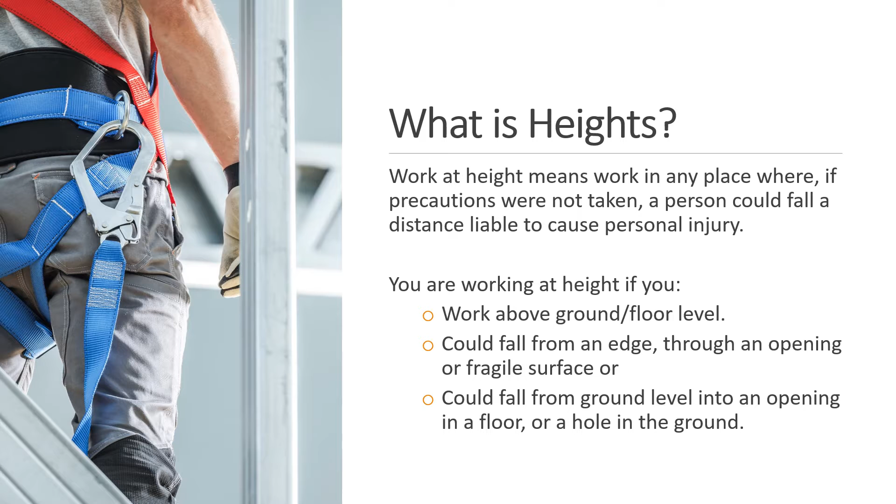When it comes to working at height, we must remember to ensure there is a proper fall protection plan in place. Although this is generally discussed in the construction regulations, no matter where a plumber is working at height, we need to ensure that all precautionary measures are taken to ensure that all work at height is done safely.

Let us have a look at some of the precautions as laid out in Construction Regulation 10 for fall protection. A competent person is to be responsible for the preparation of a fall protection plan. Risk assessments of all work carried out from a fall risk position, as well as the procedures and methods used to address all risks, must be identified per location.

The process for the evaluation of an employee's medical fitness necessary to work at a fall risk position, as well as having the records thereof. There should be a program for the training of employees working from a fall risk position, as well as records of those. There should also be a procedure for addressing the inspection, testing and maintenance of all fall protection equipment.

And finally, a fall protection plan must include a rescue plan detailing the necessary procedure, personnel and suitable equipment required to effect a rescue of a person in the event of a fall incident, to ensure that the rescue procedure is implemented immediately following the incident.

This fall protection plan, as well as the rescue plan, can also make up part of your emergency management procedure, since falling from height may constitute an emergency. This rescue plan must be specific to the site as well as the task being performed. Make sure everybody working at height knows and understands what these procedures are to prevent incidents and accidents from happening.

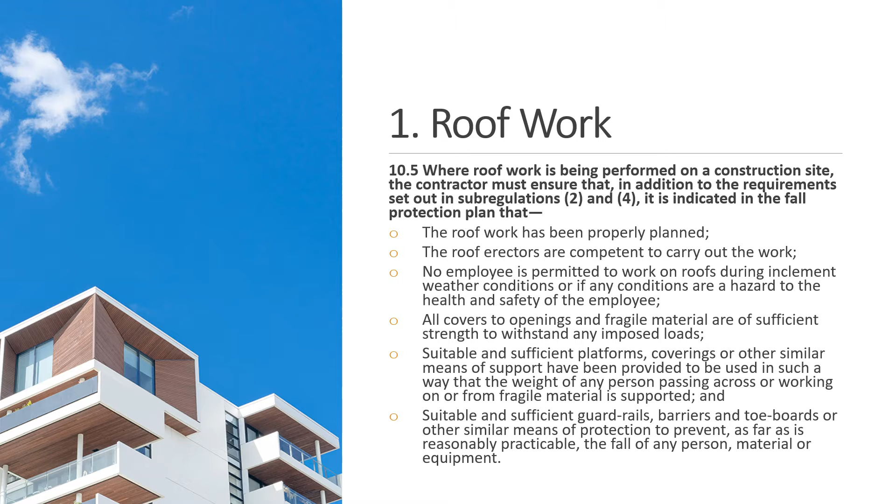Although you might not be responsible for erecting the actual roof as a plumber, if you, along with other contractors, are working on a roof, please ensure you adhere to these safety precautions as well for your specific scope.

At some point, a plumber may need scaffolding in order to perform their work. If you are on a construction site, Construction Regulation 16 on scaffolding says every contractor using access scaffolding shall ensure that such scaffolding, when used, complies with the safety standard incorporated for this purpose into these regulations under Section 44 of the Act. Since it here refers to the OHS Act under Section 44, please know that even if you are not on a construction site, all scaffolding must conform to SANS 10085.

All contractors on a construction site must ensure that all scaffolding work operations are carried out under the supervision of a competent person who has been appointed in writing, and that all scaffold erectors, team leaders and inspectors are competent to carry out their work.

Please remember that there are more than 20 different types of scaffolding. It is important that whatever type of scaffold you use, you ensure that a knowledgeable person has checked it before you get on it.

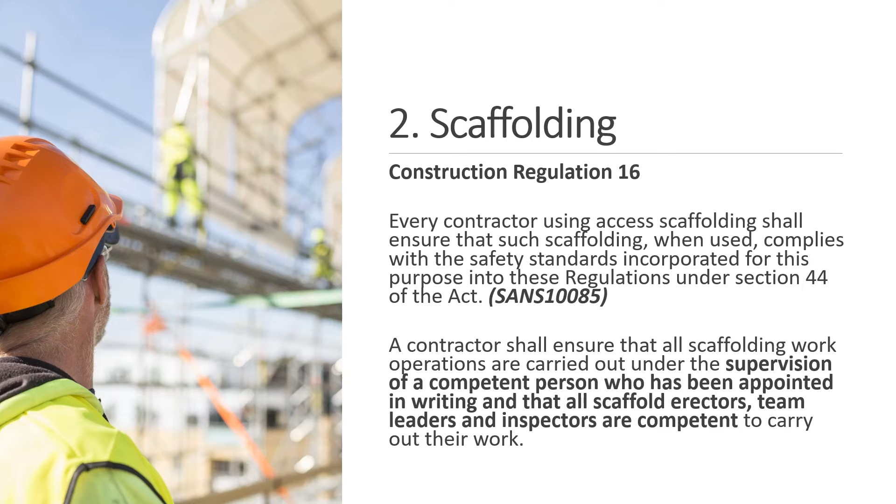In order to prevent incidents and accidents from escalating into emergencies, there are always procedures for any type of work that we do. When we are looking at ladders, every plumber must ensure that they adhere to the General Safety Regulations 13A for ladders.

It states an employee shall ensure that every ladder is constructed of sound material and is suitable for the purpose for which it is used, as well as being fitted with non-skid devices at the bottom ends and hooks or similar devices at the upper ends of the stiles, which shall ensure the stability of the ladder during normal use, or it is so lashed, held, or secured whilst being used as to ensure the stability of the ladder under all conditions and at all times.

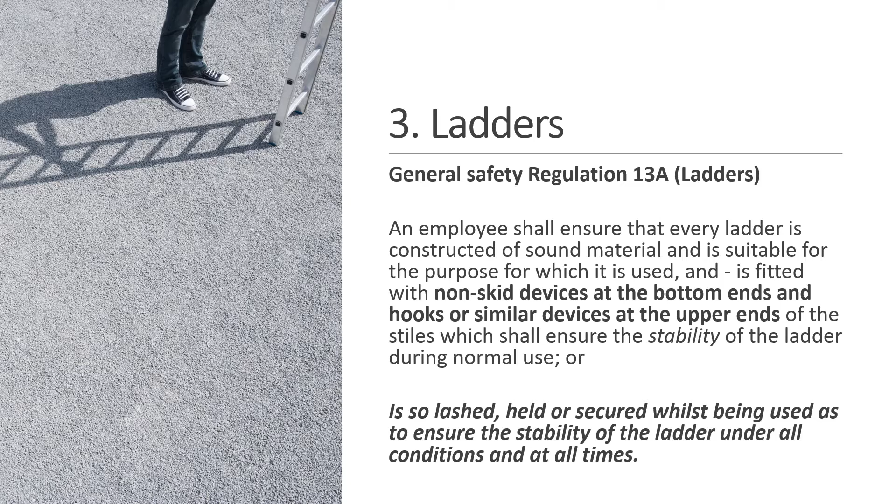No employer may permit a ladder which is required to be leaned against an object for support to be used if it is longer than 9 meters.

When work is done from a ladder, the employer shall take special precautionary measures to prevent articles from falling off, and provide suitable sheaths or receptacles in which hand tools shall be kept when not being used.

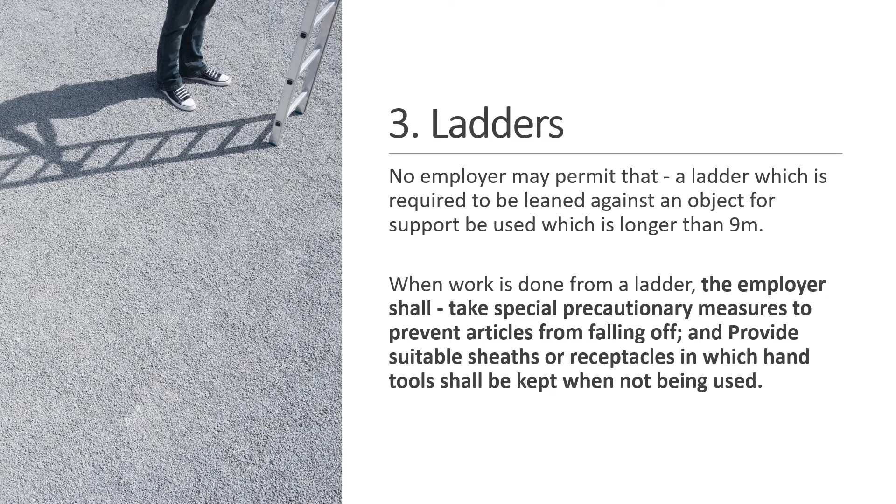Your work may even call for a mobile elevated work platform. The definition of a cradle means a platform enclosed on all sides but open at the top, designed for the purpose of raising and lowering persons by means of a lifting machine. These could be things like cherry pickers, scissor lifts, or even a man cage.

Please know that a safety harness must always be used when operating any mobile elevated working platform. Adhere to the safe working load and never operate a mobile elevated working platform without a license.

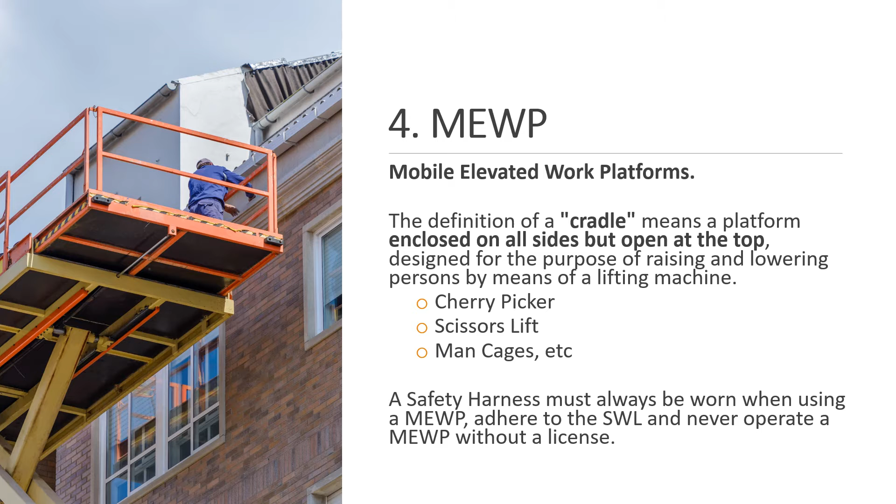Another area where there is a high possibility of falling from or through is in ceilings. When planning to work inside a ceiling, there are many hazards that we might be exposed to: unsafe access, working at heights, electricity, confined spaces, rodents or reptiles such as snakes, high temperatures, sharp objects in roof trusses and ceiling joists, as well as the location of water pipes and electrical wiring.

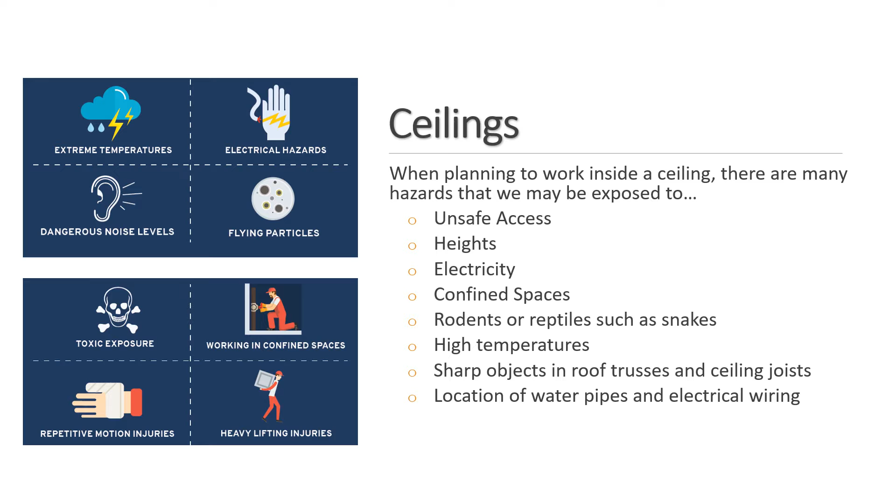When working in ceilings, it is imperative to mitigate the dangers. So you must ensure that you have safe access. According to your General Safety Regulations 13A, the ladder must be safe to use. It must be inspected and correct for the type of application. Always allow for full access through the opening of the ceiling, at least 900 millimeters past the access gap.

It should also be set up to create a stable support when climbing up or down the ladder, and always allow for hands-free working while on the ladder.

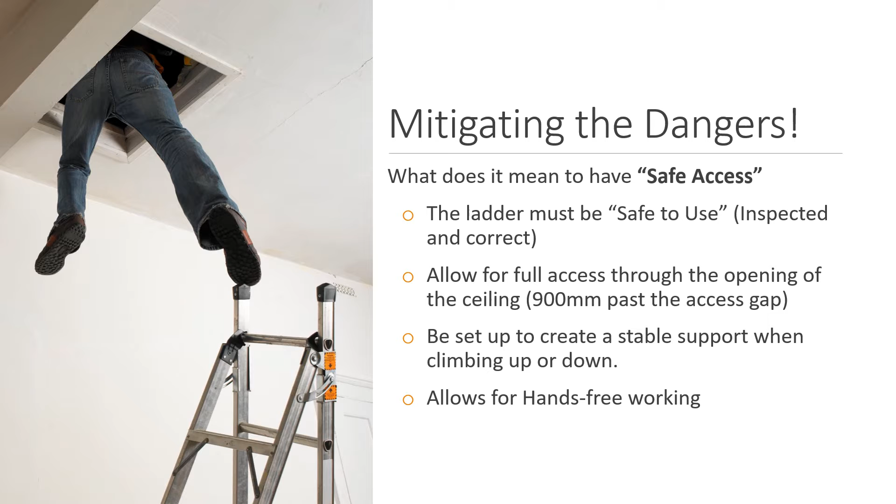Make sure that the ladder is set up to allow for a person to climb the ladder and step off into the ceiling, as shown in the picture on the left. The ladder must not be damaging any ceiling boards or the surrounding area.

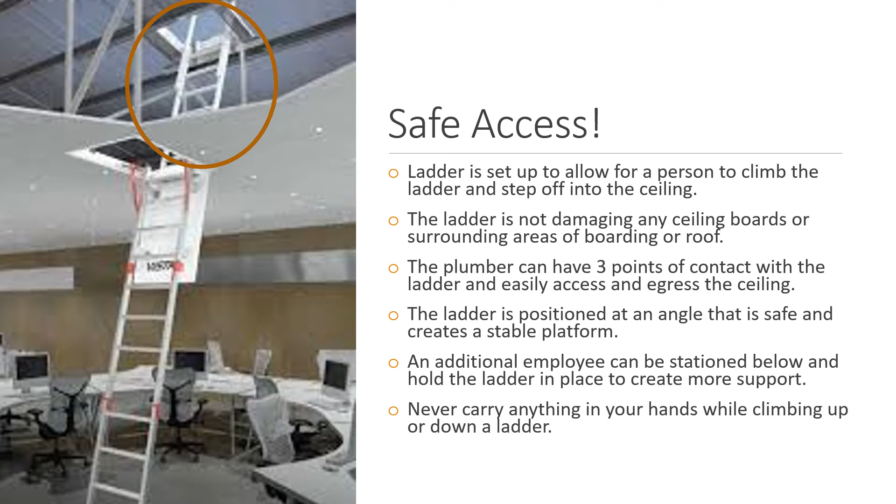The plumber can have 3 points of contact with the ladder and easily access or egress the ceiling. The ladder must be positioned at an angle that is safe and creates a stable platform. An additional employee can be stationed below and hold the ladder in place to create more support. Never carry anything in your hands while climbing up or down a ladder.

If you cannot see it, then you cannot improve it. Insufficient lighting when working inside a ceiling is a major cause of injuries and poor installations.

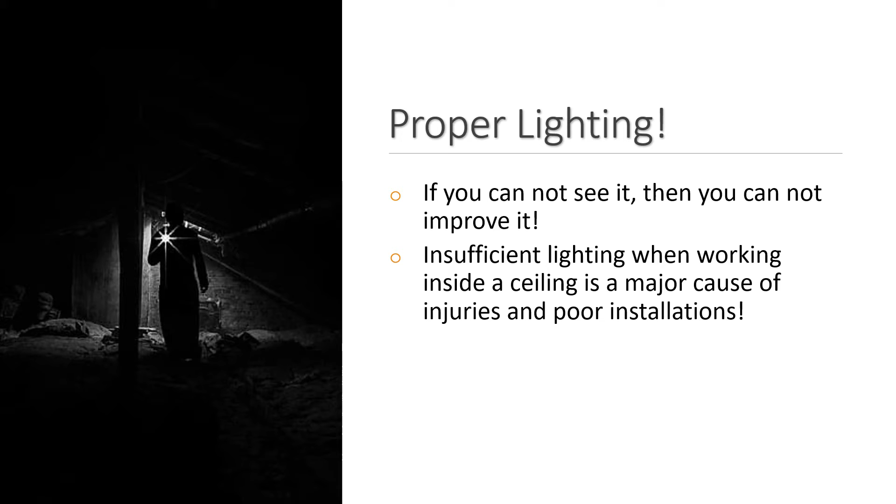Depending on your scope of work, you will either have dust accumulation in the ceiling that you can be exposed to, or if you need to drill or grind inside the ceiling, you will create dust. This will lead to difficulty of breathing, an obstructed view, or exposure to biological hazards.

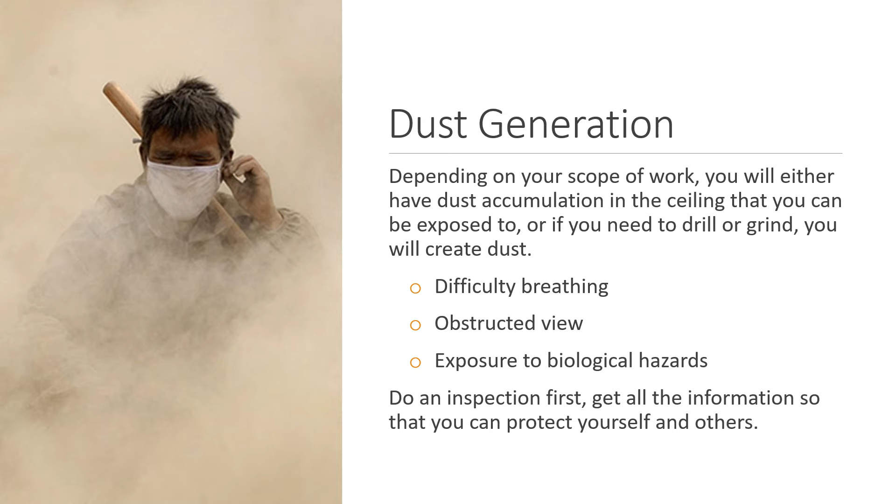First, do an inspection. Get all the information so that you can properly protect yourself and others in that working environment. Although this might be part of your safe working procedures, please remember that you need to know and understand how work is done in order to ensure your emergency management procedures match up to protecting the employees.

When preparing your emergency plan, please remember to have legal documentation in place. Each hazard needs to be understood and the risk assessed. In other words, if you know that you need to climb into a ceiling, you know that you will need to have a safe ladder for access and egress, as well as adequate lighting inside the ceiling.

You will be exposed to dust and limited foot space where you can stand. It also may be very low or cramped. It is best practice to develop a proper safe operating or safe working procedure for these individual activities so that the safest and least risky method may be used. It could save your life.

Although it is our last form of control, PPE is still mandatory and must be chosen and worn correctly. So ask yourself, what do you need protection from? Check the risk assessment and also do research on what type of PPE is needed for the job.

Get more than just one quote and then research the PPE on that quote. If necessary, you may need to amend the risk assessment for the right type of PPE. Make sure that all employees are trained on the use, care, and disposal of PPE. And you must have inspections, registers, and checklists for your PPE. Remember, PPE protects you, so look after it.

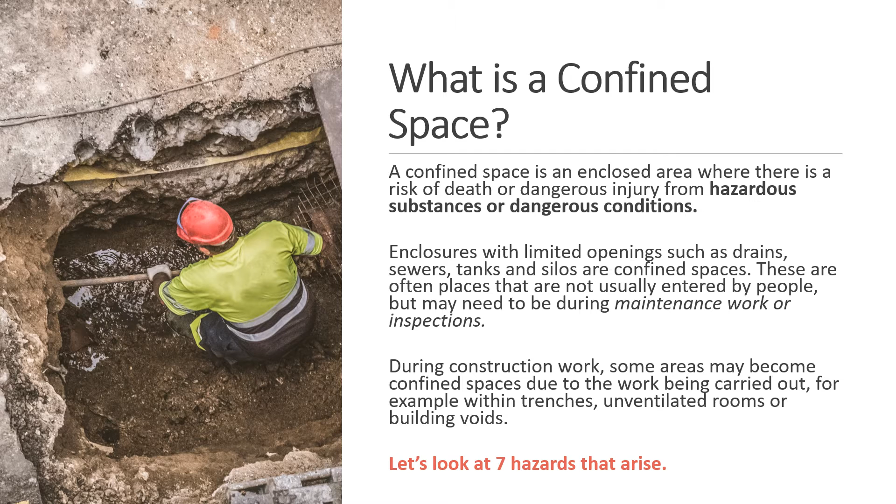Another area of emergency management may be the need to prepare for confined spaces. A confined space is an enclosed area where there is a risk of death or dangerous injury because of hazardous substances or dangerous conditions. Enclosures with limited openings, such as drains, sewers, tanks, and silos, are confined spaces. These are often places not usually entered by people, but may need to be during maintenance work or inspections. During construction work, some areas may become confined spaces due to the work being carried out, for example within trenches, unventilated rooms, or building voids.

Let us now have a look at 7 major hazards that you may need to prepare for in your emergency management. The first one is lack of oxygen. Oxygen can be removed from the atmosphere within a confined space through naturally occurring reactions. A reaction between certain soils and the oxygen, or groundwater and chalk, or limestone, can produce carbon dioxide, which displaces oxygen. Rust forming inside the tanks can also create a lack of oxygen.

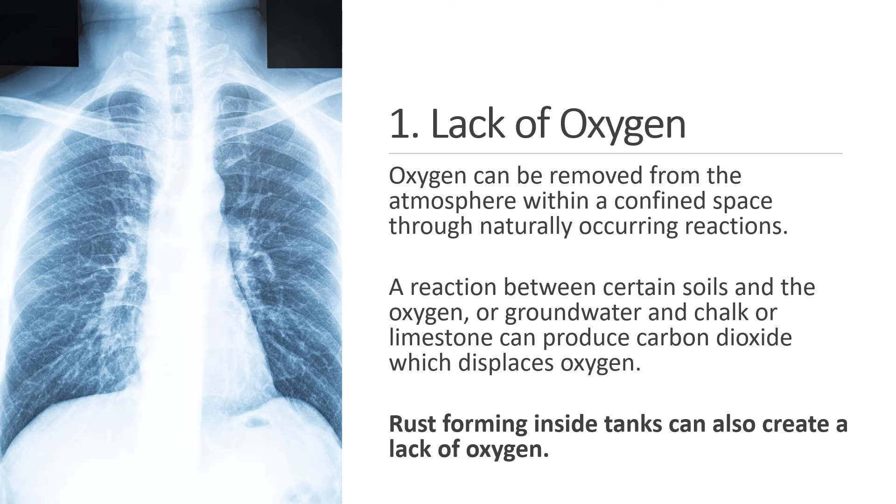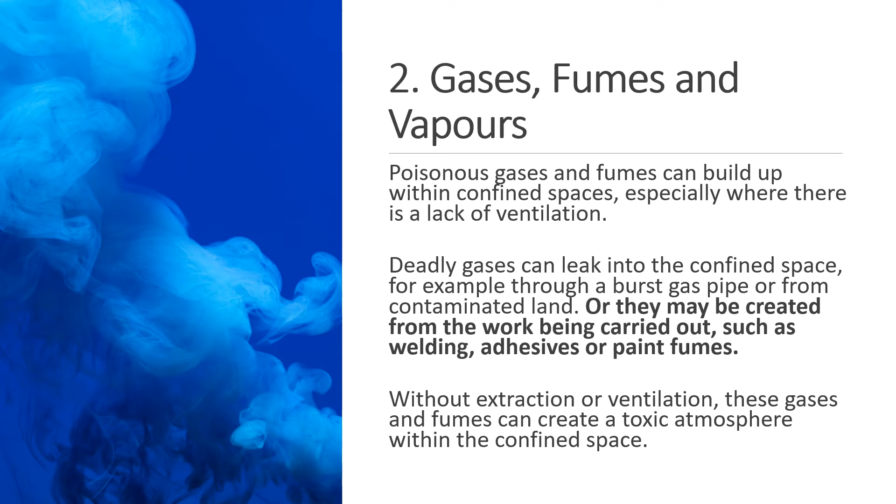A second type of hazard comes from gases, fumes, and vapors. Poisonous gases and fumes can build up within a confined space, especially where there is a lack of ventilation. Deadly gases can leak into the confined space, for example through a burst gas pipe or from contaminated land. Or they may be created from the work being carried out, such as welding, using adhesives, or paint fumes. Without extraction or ventilation, these gases and fumes can create a toxic atmosphere within the confined space.

A third type of danger is flooding. Liquids can quickly flood a confined space, particularly in drainage or sewer work, trapping and potentially drowning those within. And it's not just liquids you should worry about. Solids can also flood confined spaces. For example, in trench collapses, those within the trench are at risk of being trapped or buried. Confined spaces can be small, so flooding can occur in a matter of seconds, leaving no time to escape.

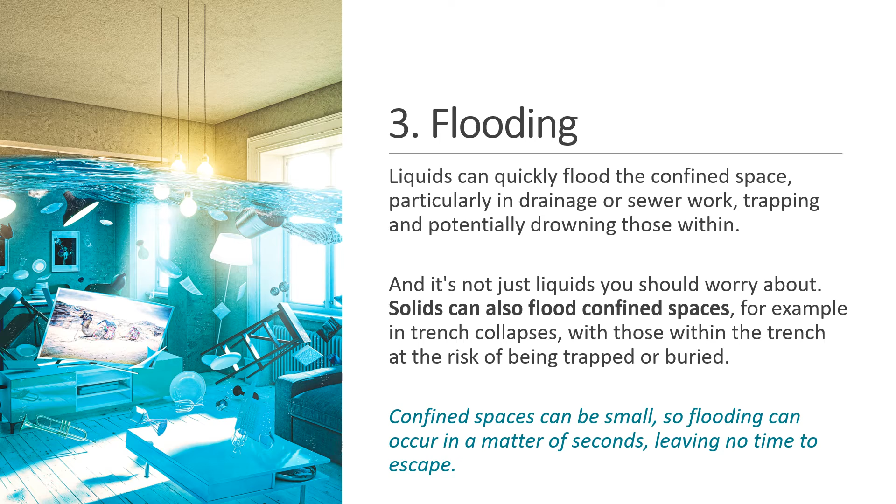The fourth hazard is dust. Dust can build up within a confined space, either naturally occurring or through the activity being carried out, such as drilling or grinding. Excessive dust inhalation causes respiratory problems, and hazardous dust can be fatal. Dust buildup can also increase fire explosion risk, especially where there is a lack of ventilation.

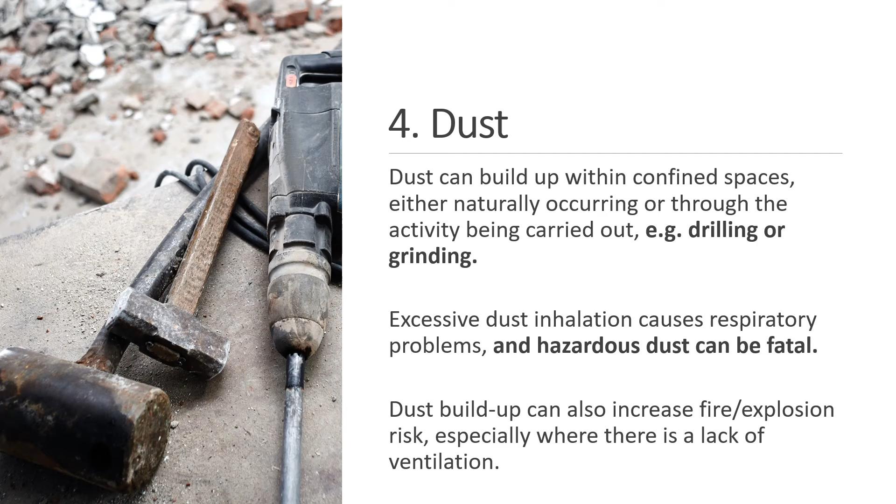Fire and explosions are our fifth hazard. Flammable vapors, liquids, gases, and dust within the confined space can all increase the risk of fire and explosions. The risk is increased further where any hot works or tools which can spark are used within the confined space. Remember how a lack of oxygen was number 1 on our list? Well, too much oxygen is also bad. Excessive oxygen levels increase the risk of fire and explosions.

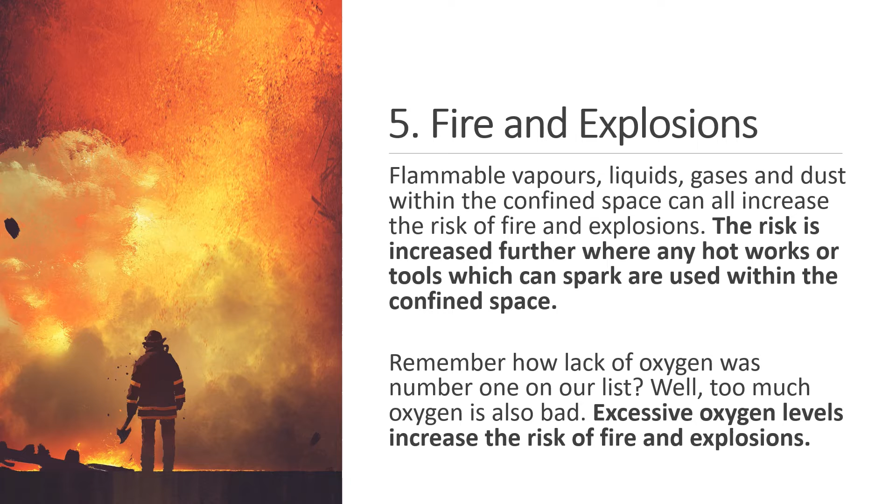In the event of a fire emergency, ensure you have the necessary fire safety equipment. This could include a fire alarm or emergency alarm, first aid equipment, firefighting equipment, fire escape route drawings, as well as the location of emergency equipment. All employees must know and understand what the procedure is during a fire emergency.

Our sixth hazard could be temperature related. Strenuous work, hot works, or naturally occurring hot conditions can lead to a dangerous increase in body temperature. This can quickly become a real problem within a confined space that is hard to escape from at the best of times. Heat can rapidly rise due to the enclosed nature of a confined space. This could lead to heat stroke, exhaustion, and collapse.

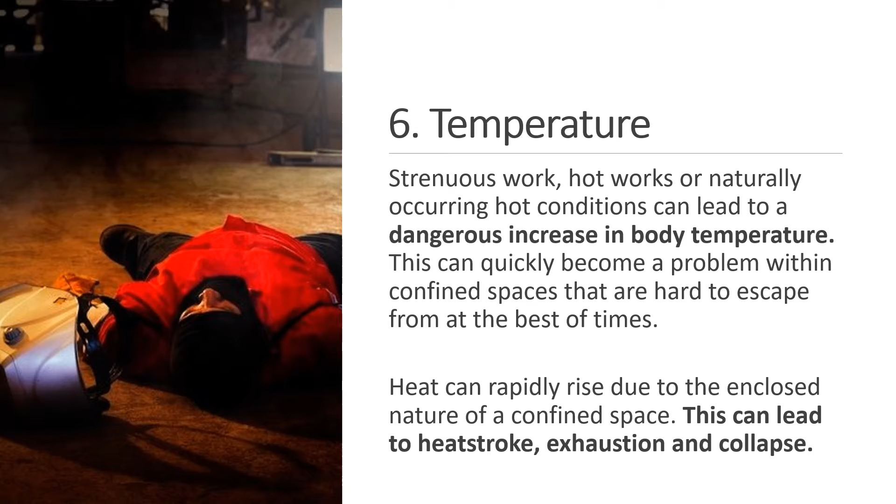Our seventh hazard are access restrictions. Confined spaces are also dangerous because they can be difficult to access. This makes escape or egress difficult and also hinders any emergency rescue. Once you are inside a confined space, there may not be a quick or easy way out. So, it is important to know that work can be carried out safely before you enter, and then the necessary emergency arrangements must be in place.

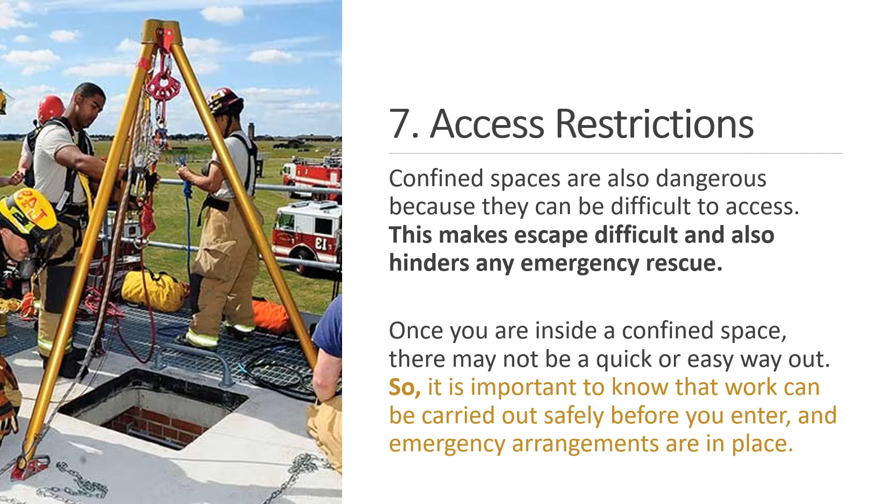Many plumbers may need to dig or work in or around excavation and trenching. Excavation hazards are common in the plumbing industry. These plumbers are more than twice as likely to be killed as workers in any other type of construction work. Excavations and trenches are unstable by nature, and many types of serious hazards exist when doing this type of work.

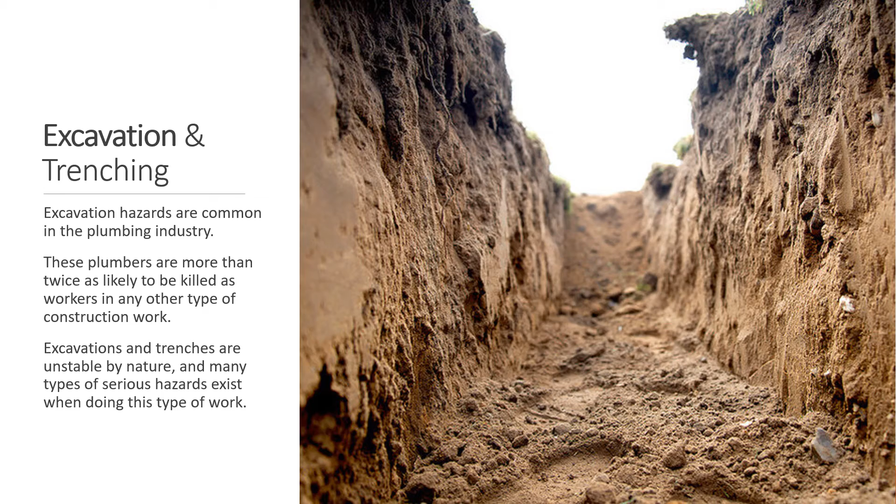Cave-ins are a type of caught-between risk. Cave-ins can suffocate or crush workers. Hazardous atmospheres can kill or injure workers, such as having oxygen deficiencies, flammable gases, or toxic gases.

Workers can drown in water, sewage, or chemicals if these haven't been controlled by diverting them elsewhere or locking them out to prevent the exposure to the worker. Workers can face burns, electrocution, or explosions while working in or around various underground utilities such as steam, hot water, gas, as well as electricity.

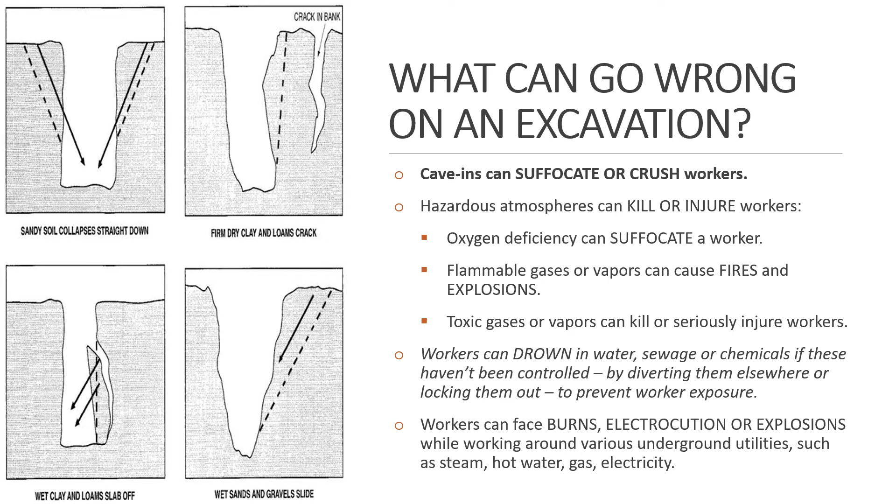The danger of cave-ins is very real. Cave-ins occur when the soil is unstable, when there is a lot of vibration from nearby trains, trucks, traffic, or even machinery, or even when there is too much weight too close to the sides of the excavation. This could be from the excavated material itself, from tools, equipment, materials, or even vehicles located on the site. Also when there is too much water in the excavation, or when there are changes in the weather.

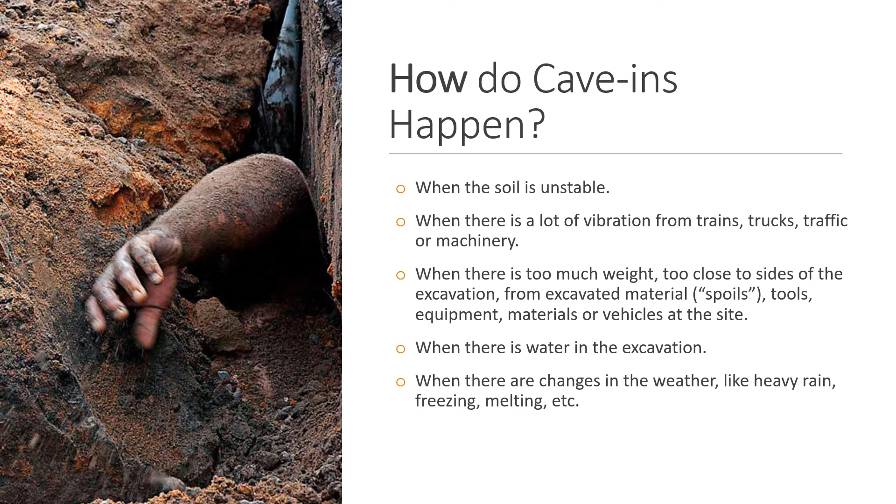Plumbers may also be exposed to electricity-related hazards, such as fire and burns. Electricity is the flow of electrical power or charge. It is a secondary energy source, which means that we get it from the conversion of other sources of energy, like coal, natural gas, oil, nuclear power, and other natural sources, which are called primary sources.

While any amount of current over 10 milliamps is capable of producing painful to severe shock, currents between 100 and 200 milliamps are lethal.

Geysers, hydroboils, pumps, and others all use energy. Plumbers may be exposed to electricity-related hazards before the installation, during testing, or even when performing inspections. All plumbers should know and understand the danger of energy sources and the potential for serious injuries and even death.

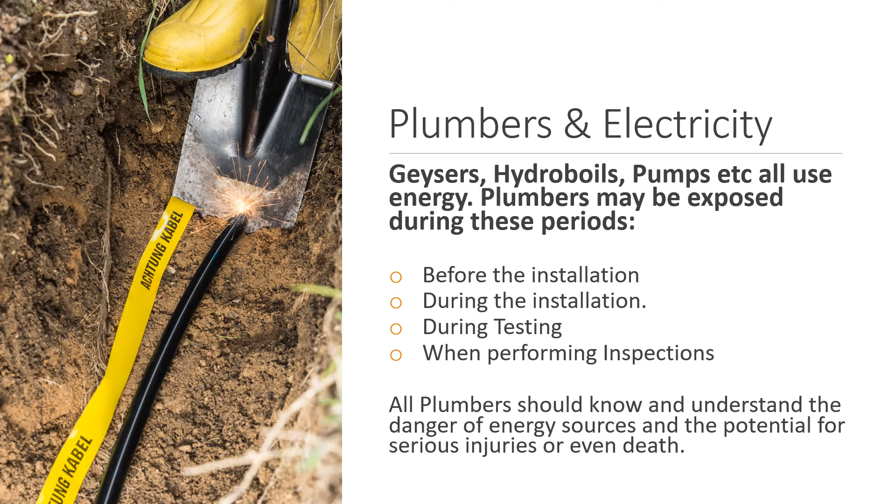Whether you are doing your own electrical work or not, it is vital to ensure that all energy sources are isolated or locked out before work can start on energized plumbing.

Identify the potential live energy source. Then isolate, lock, and tag out energy sources. Remember that all electrical works must take place by a qualified and approved electrician. Inform everyone of the dangers of the energy source by means of toolbox talks, risk assessments, and signage.

Sometimes you will need energy to perform a site setup. In this case, identify the least hazardous energy source and control the area to ensure it can function.

Most often, electricity is needed for the installation of plumbing, like the use of drills, grinders, or extension cords. In this case, all power tools must be kept in a safe-to-use condition. The potential for electrocution must be eliminated by ensuring that all tools conform to standards for the specific tool.

All power tools must be placed onto a register and have a checklist specific to the tool being used. Only competent employees may use portable electrical tools. Inspect your power tool before use. Maintain it as per the manufacturer's instructions, and always check that you have the correct power tool for the task.

Remember, if it is not battery operated, the power tool that you are using is not the source of energy. It may need to be plugged into something first. So make sure that where you are getting your energy from is also safe and free from the risk of electrocution to you or others.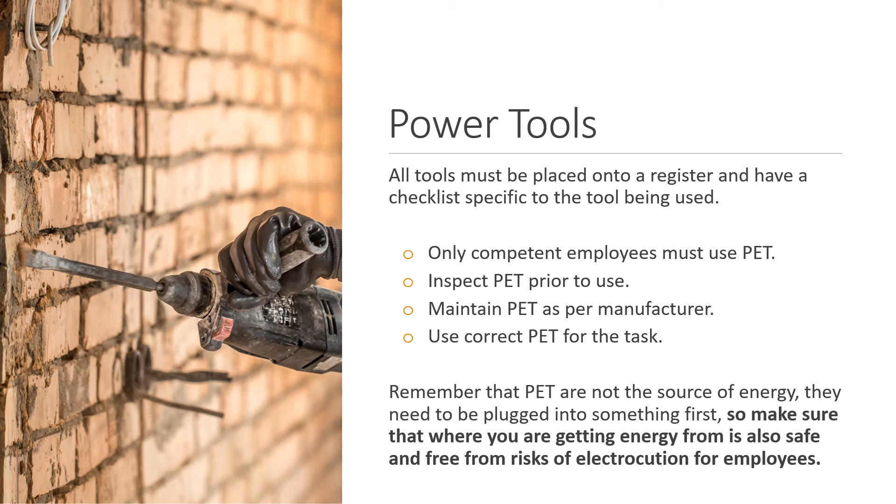The potential for electrocution by energizing plumbing is very high when you are now testing the installation. It is important to check all connections before removing your isolations to ensure that there is no loose or exposed wiring. When doing an inspection, treat it as high-risk work, since you will now be exposing yourself to an energized piece of equipment that has not yet been tested as safe.

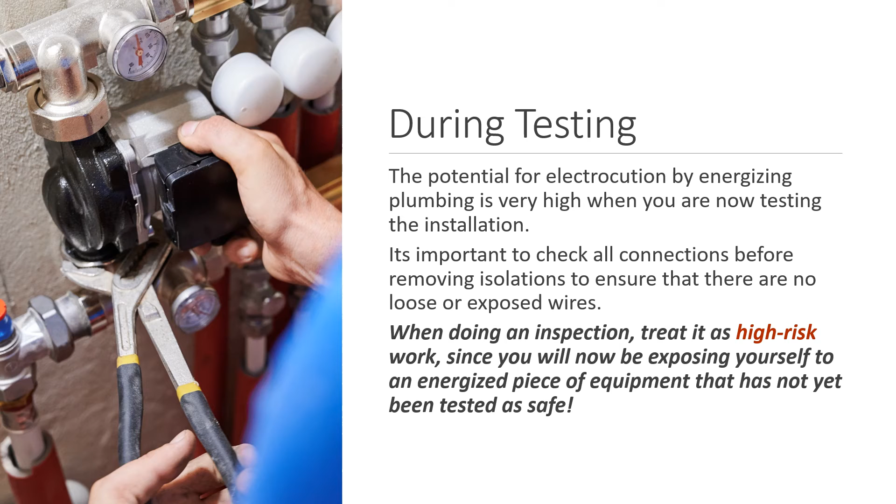A major cause of injuries among plumbers is the lack of safety during an inspection. The inspection is done to either quote a client or check if the work has been done correctly. In the mind of a plumber, this is not a risk as no work is being performed. But don't fool yourself or think that hazards and risks do not appear until manual labor is being done. Since the condition of any installation is essentially unknown, you should treat the risks as if they are already present until you establish otherwise.

Remember that electricity is a silent killer. While any amount of current over 10 milliamps is capable of producing a painful to severe shock, currents between 100 and 200 milliamps are lethal.

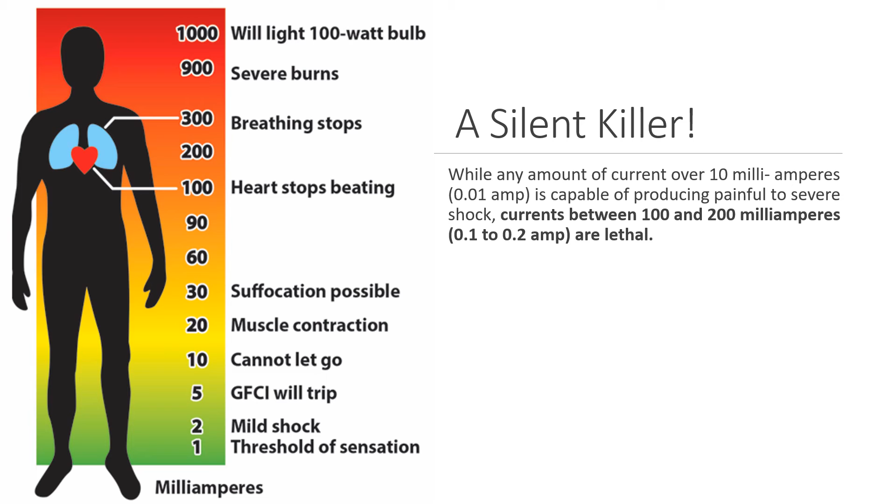Plumbers are also at risk of scalding. The definition of scalding is a form of thermal burn resulting from heated fluids such as boiling water or steam. Most scalds are considered first or second degree burns, but third degree burns can result, especially with prolonged contact.

Ensure that your emergency management covers the need for training and education, anti-scald valves, thermostatic temperature valves, as well as planning and prevention of such incidents.

SANS 10252-1 Clause 6.6.1.3 reads as follows: wherever water is heated, the energy supply to each heater shall be under effective thermostatic control. In severe circumstances, a poor plumbing installation may even result in serious injury or death.

For example, an incorrectly installed geyser or hot water storage vessel could explode and harm occupants inside a building. A faulty installation could also cause severe burns. Bear in mind that hot water of 60 degrees Celsius can result in a serious scald in about 5 seconds.

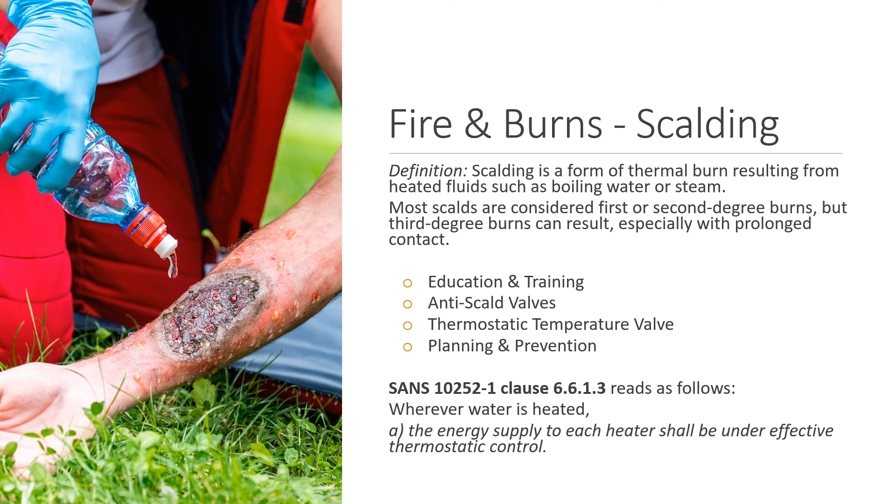Have you ever complained about knee or back injury? This could be due to work or task-related ergonomic hazards.

According to the International Ergonomics Association, ergonomics is the scientific discipline concerned with the understanding of interactions among human and other elements of a system, and the profession that applies theory, principles, data, and methods to design in order to optimize human well-being and overall system performance.

To put it simply, ergonomics is the process of designing or arranging workplaces, products, and systems so that they fit the people who use them. The goal of ergonomics is to create a safe, comfortable, and productive workspace by bringing human abilities and limitations into the design of a workspace.

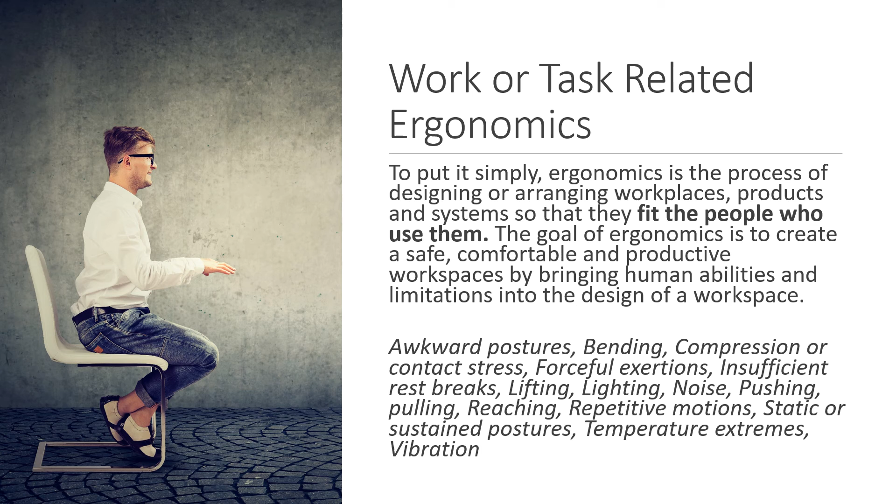Plumbers are at risk of ergonomic-related hazards because of awkward postures, bending, compression or contact stress, forceful exertions, insufficient rest breaks, lifting, lighting, noise, pushing, pulling, reaching, repetitive motion, static or sustained postures, temperature extremes, and vibration.

This is why it is so important to have an ergonomic risk assessment. Understand the ergonomic workplace risk. Make sure that you know the task or activity related physical factors, the cognitive risk factors, the environment related factors, the technology or tool related factors, as well as the organizational risk factors.

There should be an easy reporting of potential ergonomic risks by employees to the employer. There should also be a risk map and priority listing. Always ensure that this form of control develops specific countermeasures to help each ergonomic risk. Then make sure that you monitor and review the risk assessment to ensure that it is adequate and compliant to regulations.

Injuries resulting from bad ergonomics are preventable. The benefits of good ergonomic practices range from reducing business cost, improving quality, and creating a better safety culture at work. Employees performing tasks under bodily stress can lead to ailments that cost your business money. While the costs associated with ergonomics, like special chairs and workstations, can seem like a barrier at first, the long-term results are healthier and more productive employees, which are best for business.

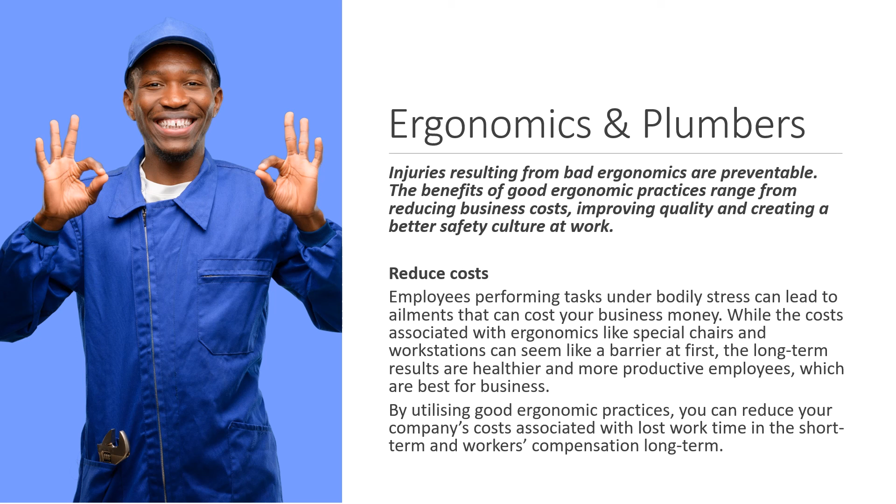By utilizing good ergonomic practices, you can reduce your company's costs associated with lost work time in the short term and workers' compensation in the long term.

Ergonomics improves productivity. When employees are in pain, they focus on those pains, not their work. Studies have shown that the greater the pain, the more productivity plummets. Properly set up workstations can create happier employees. A comfortable workstation, allowing good posture and fewer motions, can even increase work productivity.

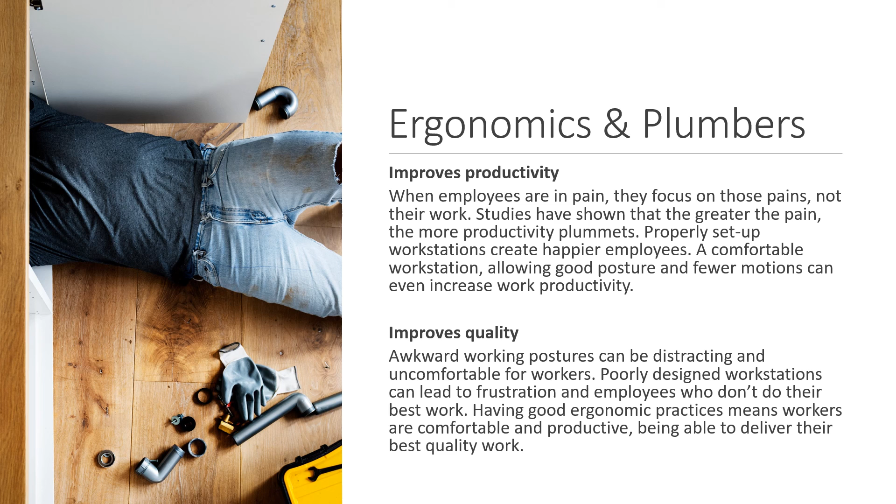Ergonomics also improves quality. Awkward working postures can be distracting and uncomfortable for workers. Poorly designed workstations can lead to frustration and employees who do not do their best work. Having good ergonomic practices means workers are comfortable and productive, being able to deliver their best quality work.

Good ergonomics improves employee engagement. When you invest time ensuring your employees are healthy and safe, it will be noticed. When employees feel taken care of by their company and are comfortable doing their job, this will increase morale and reduce staff turnover and absenteeism.

Ergonomics also creates a better safety culture. Having healthy employees is your most valuable asset as a business. The accumulation of the 4 previous points will lead your workplace toward better performance from staff as well as help foster a robust safety culture.